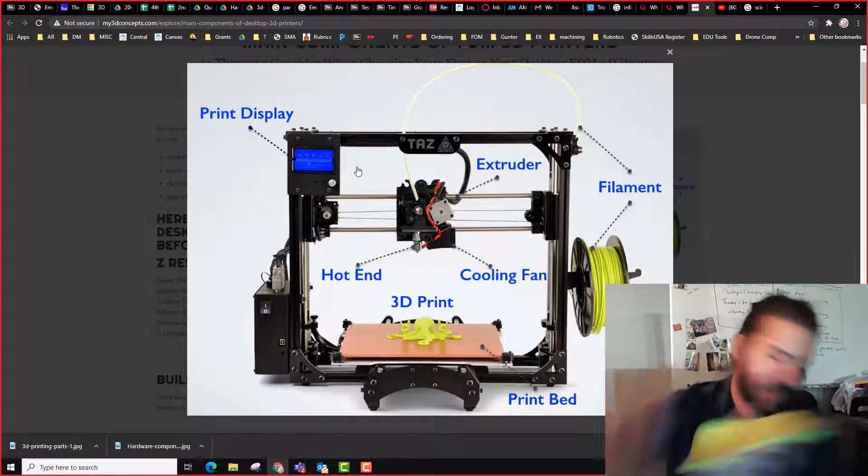This one uses plastic filament - it's kind of like a plastic string that goes up through here and comes through an extruder. This extruder is a little motor that can move this wire back and forth, and then it goes into this hot end. Imagine this is like the tip of a glue stick - it's really hot, you don't want to touch it, it'll burn you.

And it extrudes the melted plastic one layer at a time and slowly builds it up.

Now there's a few different axes here, and different 3D printers are labeled differently, but generally when I look at one of these, I just think of it like a graph. I make this my X and Y axis - the left and right is my X, the back and forth is my Y, and the up and down is what we call our Z, and those are all controlled with motors.

So here's the Z motors that twist and make this whole thing go up and down. This has motors here and here that make it go left and right on the X-axis, and this whole print bed goes back and forth on these rails, controlled by motors.

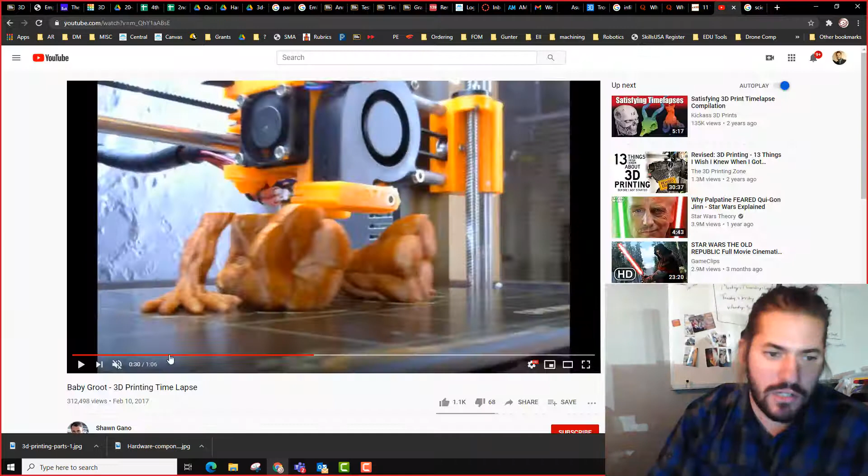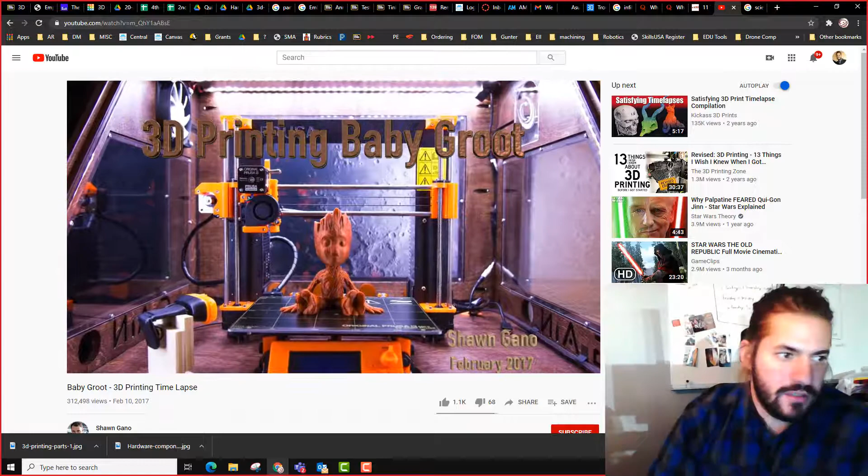So I'm going to watch - this is a video by Shawn Gano, a time-lapse of him making this little baby Groot. He actually does it in two parts - you're going to see him do the body first and then the head.

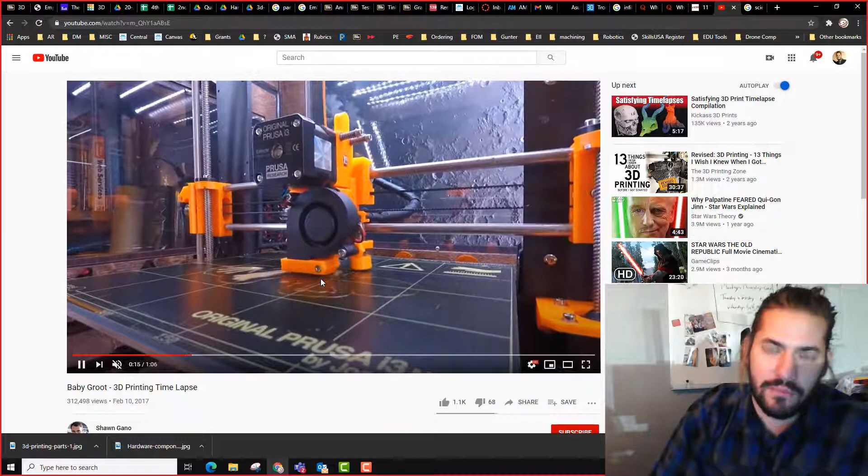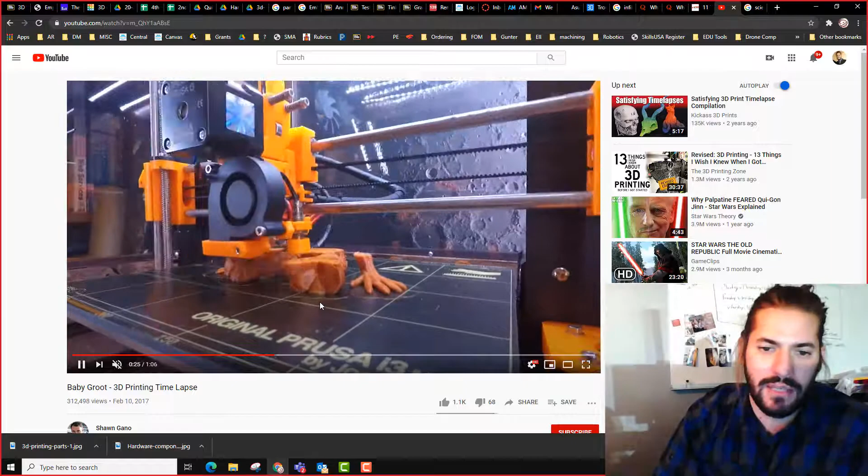Okay, so you can see it's doing the first layer, and if you look at this, it actually goes really slow. I think people think 3D printing is really cool, but it actually takes hours and hours. I have 4 3D printers in my class, and a laser cutter, and I kind of prefer the laser if I can make something with it because it's so much faster. But you can see it going layer by layer, moving up higher and higher.

This one, the bed moves as well. So he gets the neck, he stops, and now he's going to do the head. So there he makes the head, and he's going to chop that off somewhere and put it into the design.

And he's done. 3D printed objects tend to have these little layers - you can see these lines right here.

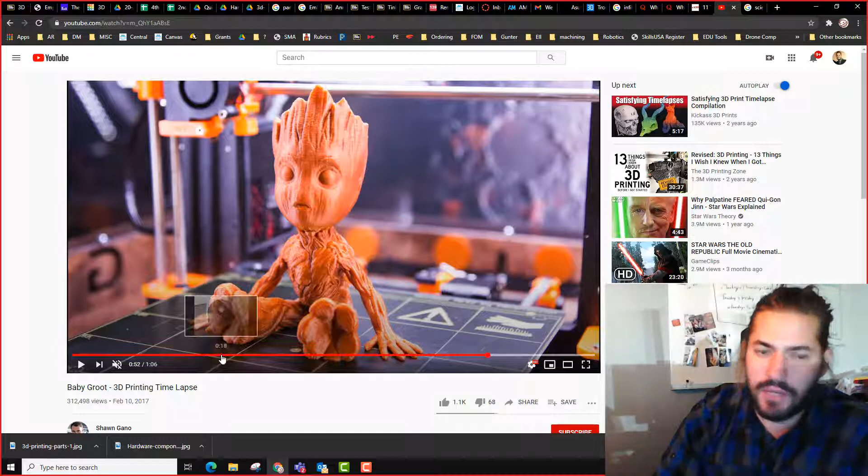Okay, so one thing to watch here is... where is it? Sorry.

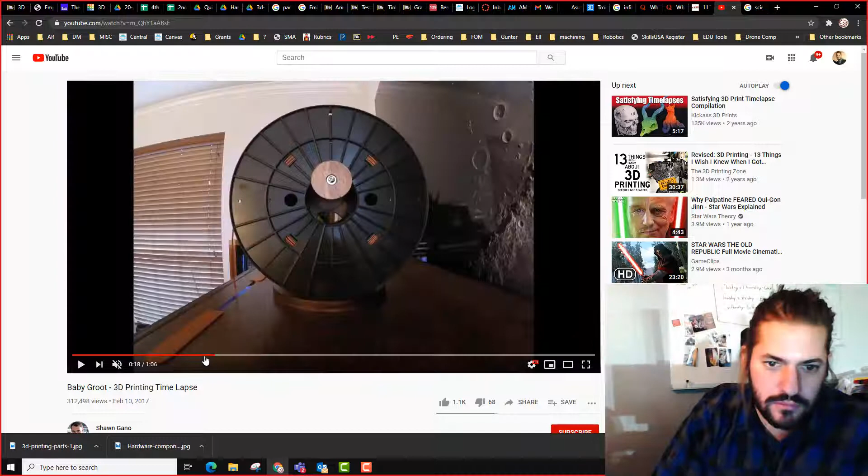Believe it or not, most of the time a 70% infill feels just as tough as 100%. It's really strong, so it really depends on what you're making, whether you want to use an infill or go 100%. You need to think about that.

These patterns are for different reasons. If you want different kinds of strength, like strength along the outside or a certain direction, the honeycomb's really good for that. It just depends - some of these are designed for saving filament. The reason you want a pattern, and generally don't just always go with 0%, is...

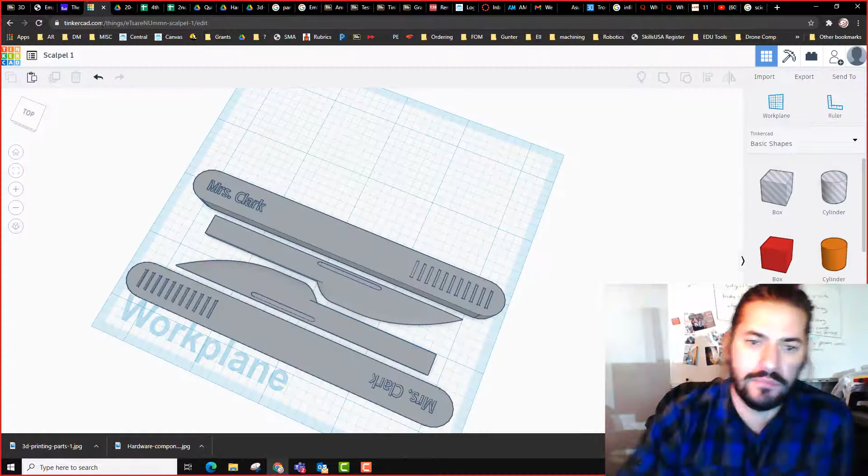So this is something that we 3D printed for a class. They're doing a competition where they demonstrated surgery and weren't allowed to bring a live blade to class, so one of my students made this for that teacher to use.

Okay, I'm going to go into Tinkercad and I'm going to create a new design.

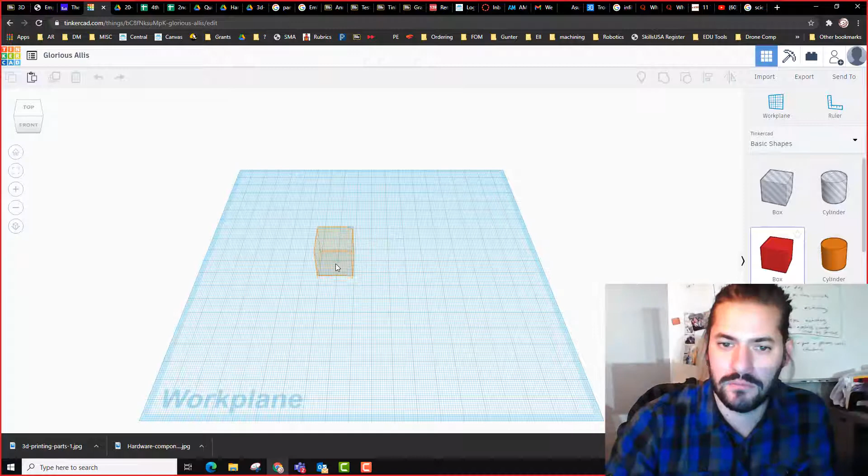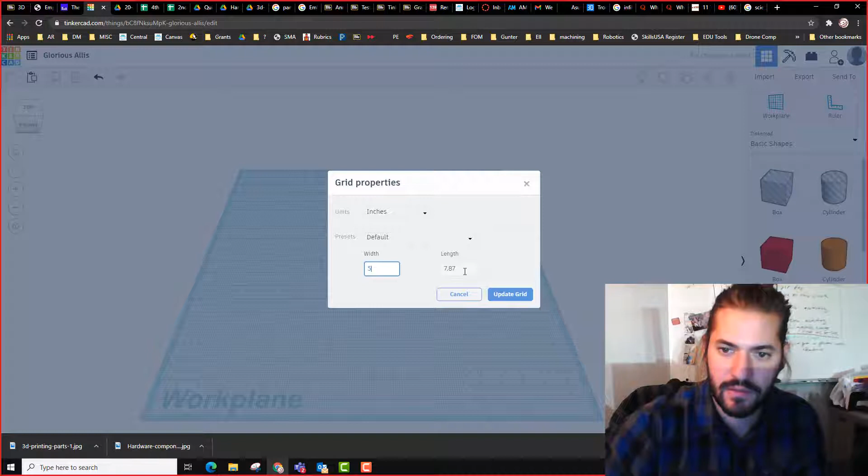First off, when you 3D print, the size of your print bed is very important, right? So I already told you guys that it was in inches, and the print bed is 5 inches by 5 inches. Okay? So you can see each one of these grids represents an inch.

So I'm going to take this and make this, okay, 4 inches. All right? Then I'm going to click this, and I'm going to hit the duplicate button up here.

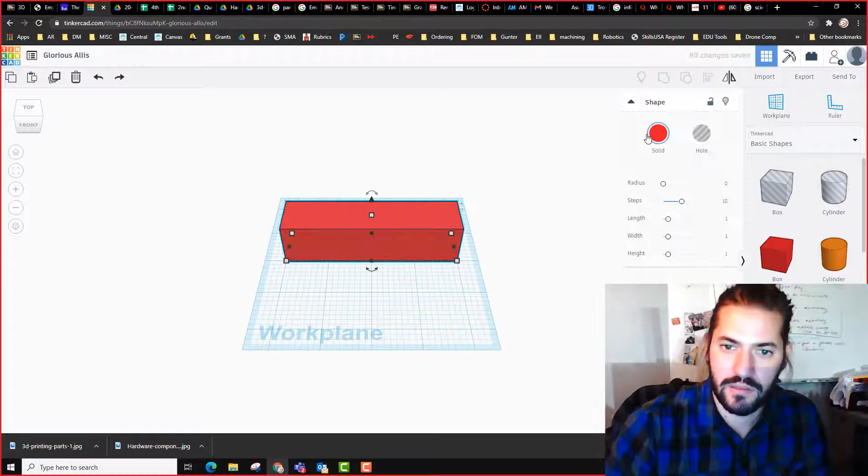Oh, actually, before I do that, I'm going to make this transparent. This will make it a little easier. So let's say this is the shape we're trying to make. I'm going to hit duplicate now. And I'm going to make this not transparent.

So remember, this is additive manufacturing. You're adding a layer. It prints the first layer, then the next layer, then the next. It's slowly building its way up. So while you're thinking about how it prints, let's talk about some shapes.

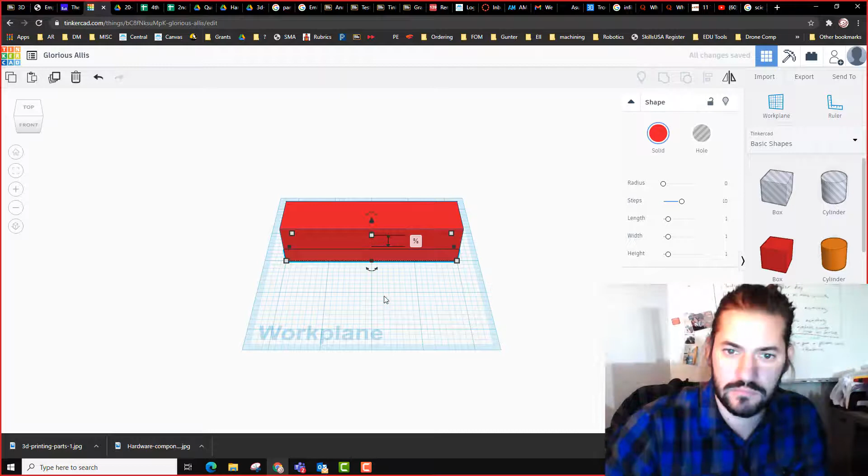So I'm gonna take this, put this down. Okay. Delete that. Okay. I'm going to bring this up 1 inch. Take some of these guys. Paste it.

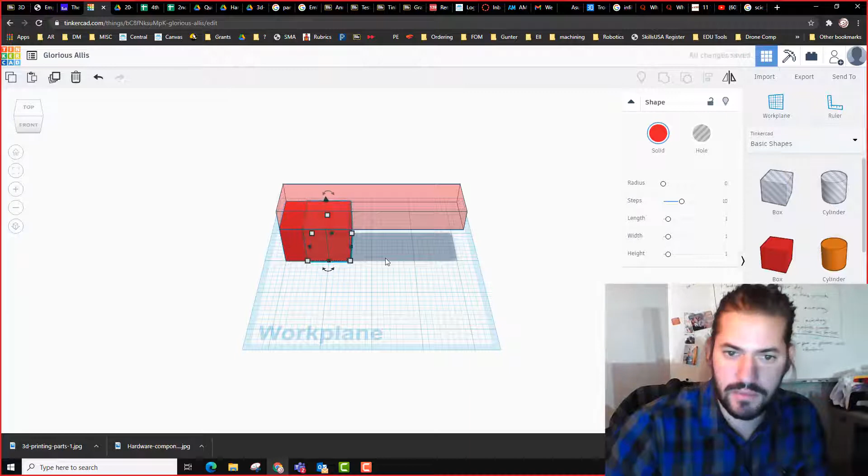And let's make this color all solid. We're going to make it one shape. Okay. So,

Kayla, what do you think? What would you think would happen if I sent this to the 3D printer? Do you think it would print just fine, or do you think there'd be any issues?

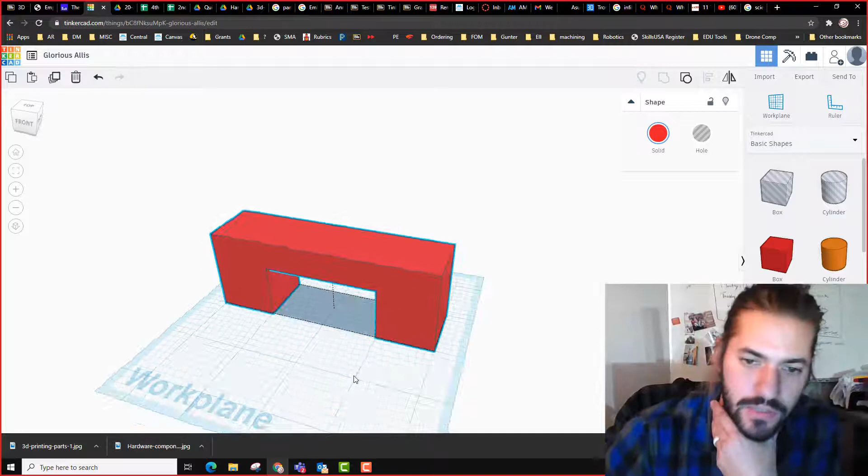I think it'd be an issue because it's too tall. The tall, kind of. Keep going. Let me see where you're going with that.

So actually going straight up and down is not an issue. So like if I want to print this right here, even though it's taller, this isn't going to have an issue.

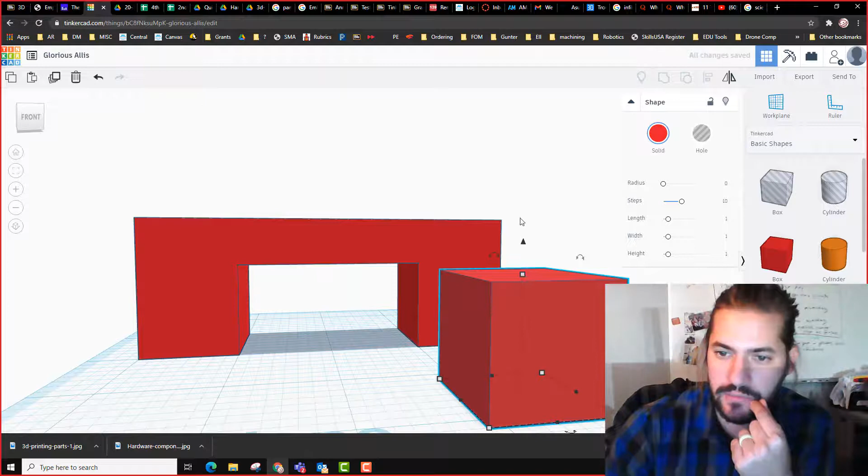So why do you think this one would have an issue when this one wouldn't? Is it because how thick it is? Nope. It has to do with that gum stretching theory I talked to you about.

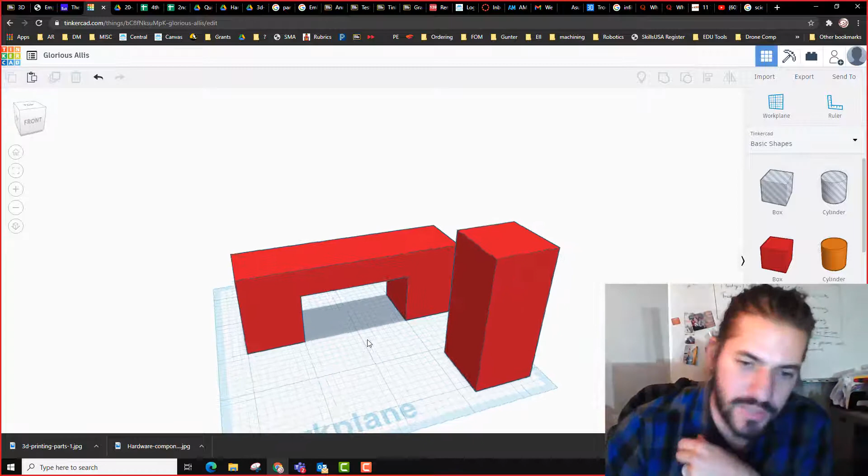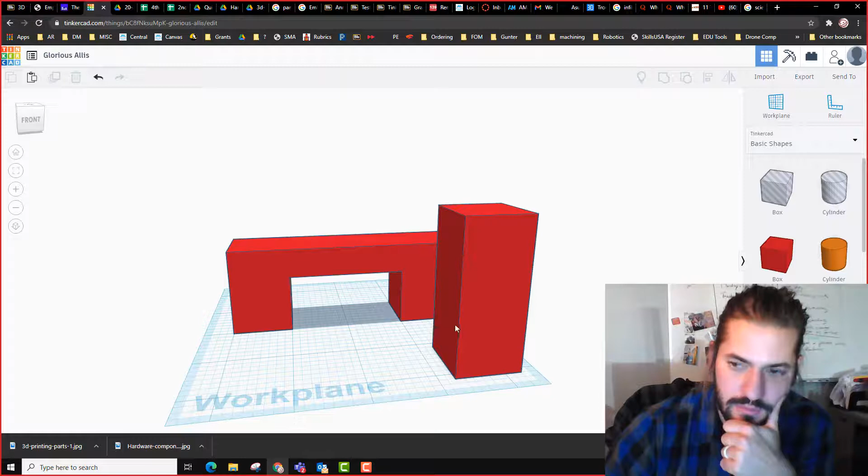Think about that. Is it too long? Kind of. So think about if I was to take a piece of hot glue and try to go across this thing, what would happen? It's not a solid, so it's going to droop down, right? It's going to create what we call a bad print.

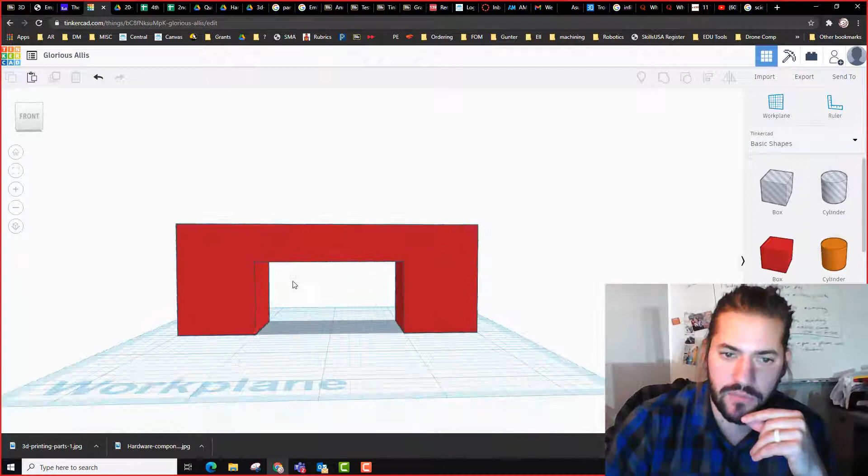Where's my design? Okay, yeah, right here. Okay, so if you try to print from here to here, it won't work. Remember the infill - if this was hollow and tried to go straight across to make this top, it's going to sag down. So you need an infill.

Well, one way to solve this is by adding supports, okay? And your slicer will generally automatically do this for you. So I'm going to make this.

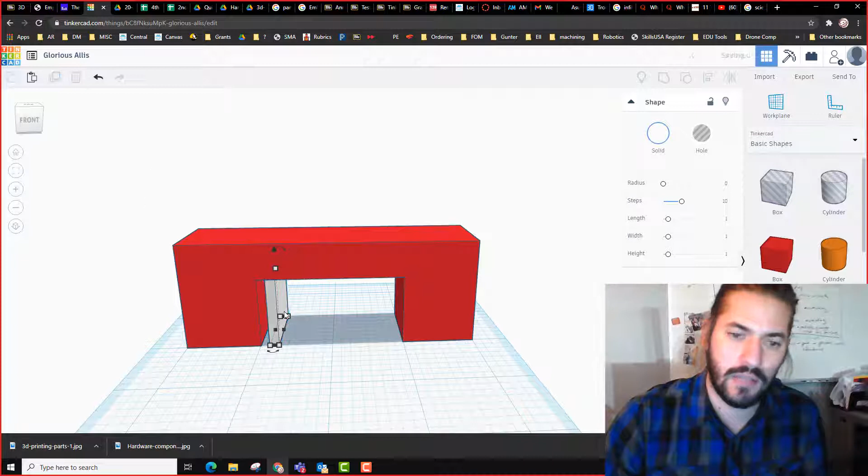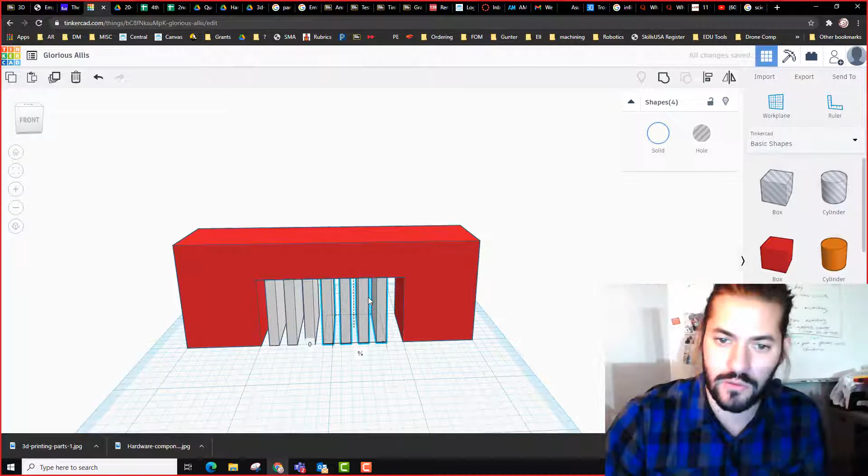Like with 3D printers that you're going to be using in this class, you're not going to have to worry about the supports, but I still want you to try to use the least amount of support possible, because it's expensive material. But do you see how if I was stringing that across, these supports would help keep that straight? Does that make sense? It wouldn't wobble down.

But there's a better way. Do you think there's a better way we can make this shape without having any droopiness but also not having to use supports?

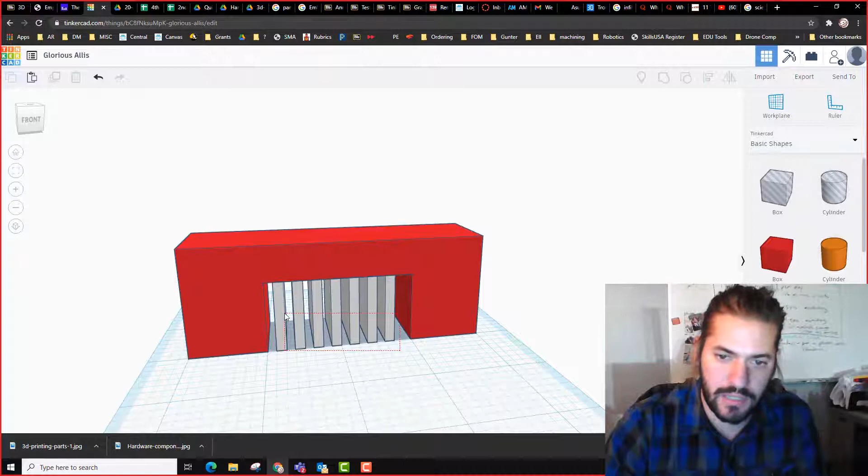If you turned it on this side, it would still be drooping. Let's do that. But if you turned it on its side - so where would it droop here?

It would droop like right here, because if you put the hot glue on there, it's gonna drip down still. But you're not - it's just building straight up.

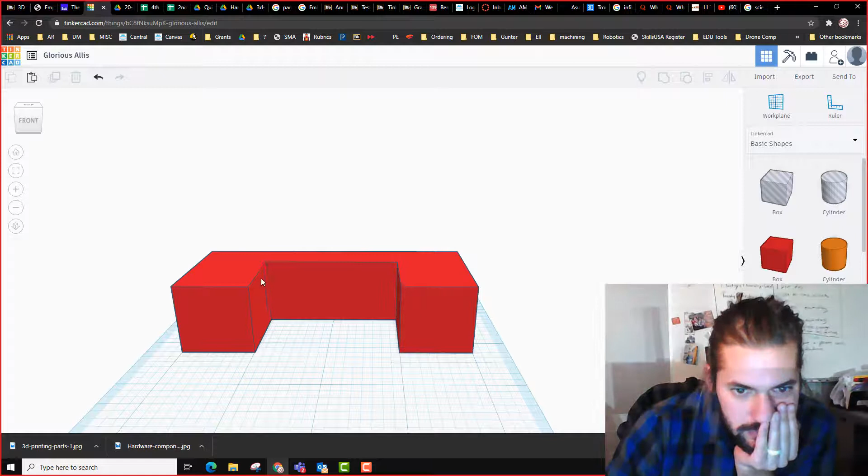Do you see? Like where you had it the other way, when it goes across here, it doesn't have anything to hold on to, so it's going to droop down. But this way, it's just building right on top of itself.

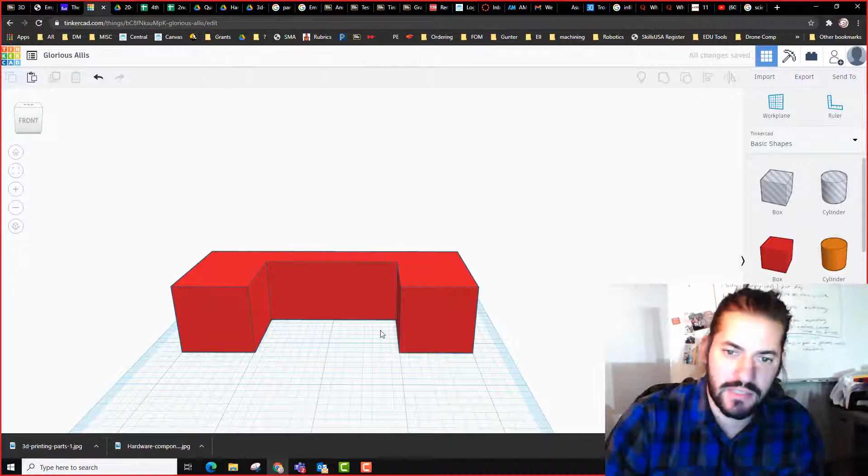And then another way to do it too - so let's go back - is I'm going to use the mirror function up here, like this.

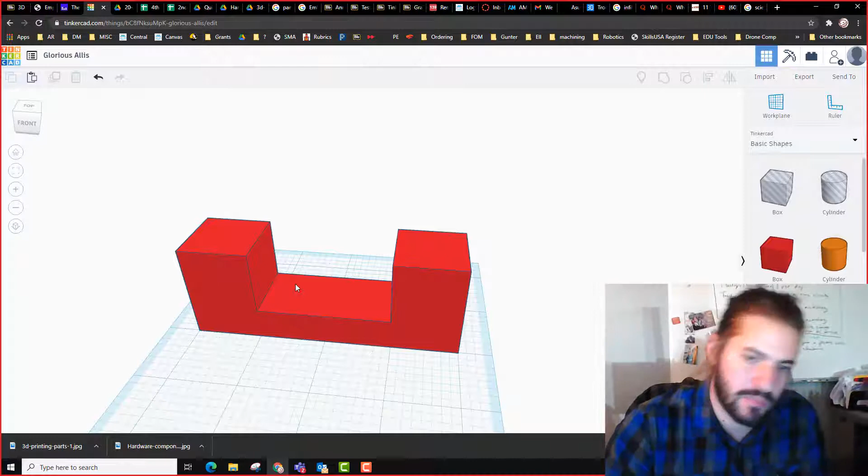So this is really the main thing I want you guys to take away from this video: understanding how to position your piece. It can save a lot of time and get you a better print by just knowing the right way to position the piece. This is the best way to do it for this particular shape, and you'd get a nice flat top, whereas the other way you'd get a nice flat side. It just really depends what the piece is for.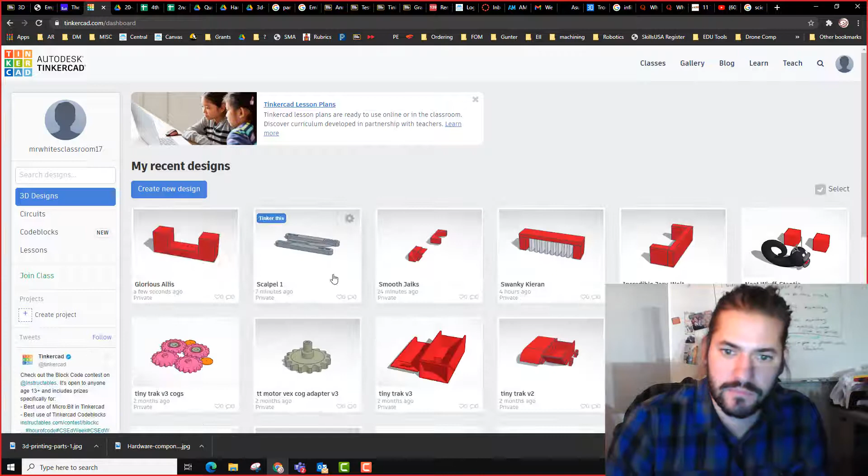Okay, so let's go. I have another design here and another question. All right, this one right here. So this shape right here.

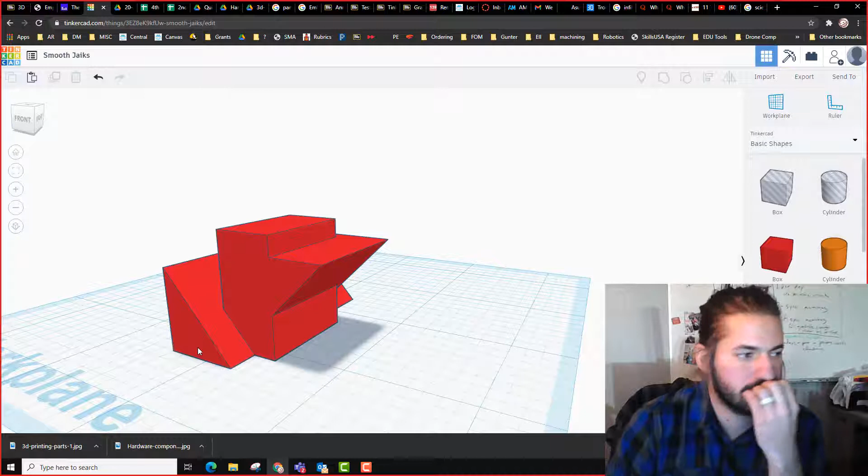Do you think I could 3D print this shape right here and not have any drooping? What do you think? I feel like this is tricky. Maybe, just go with your gut. You've never done this before, so there's really no reason to feel bad about being wrong. This is more just knowledge than anything, but I like letting you think about it.

I feel like if you're going straight up, kind of, and then kind of not. But then if you're going side to side or however you say it, I like the way you're thinking, and the answer is yes, you could 3D print this.

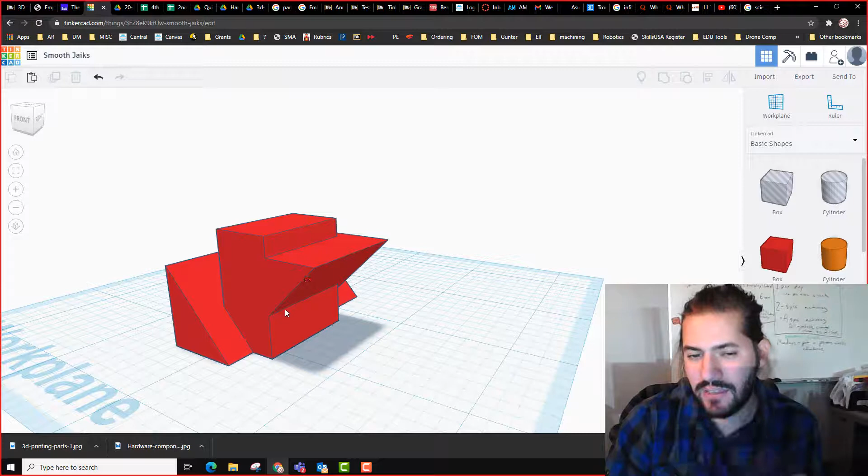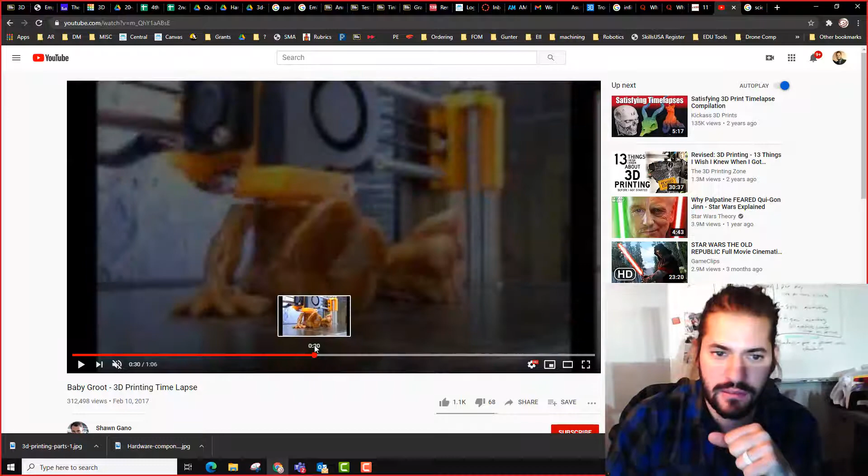I want to show you, let's go back to this video, right there. Okay, so right here, look at this overhang. You see how it's printing just fine right there? It can go a little bit to the side, it just can't go way out.

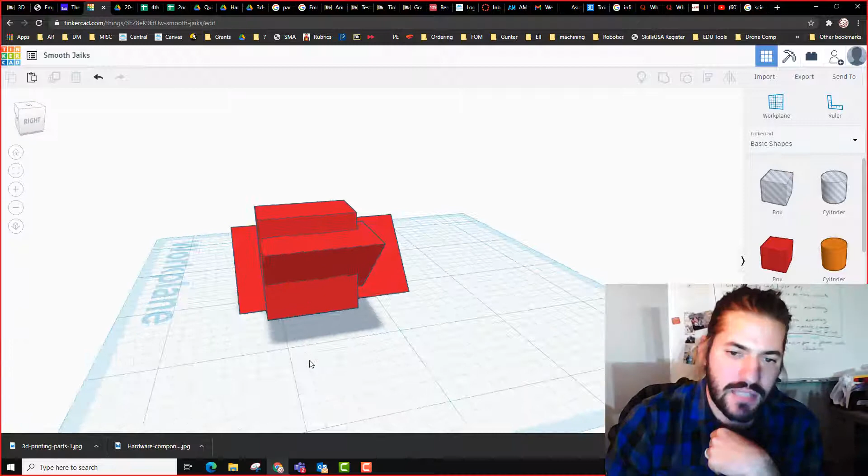Does that make sense? Just a little something I want you guys to know, because if you've never done this before, you don't know that. A lot of mistakes with 3D printing are just because people position their pieces down wrong. Some slicing programs automatically put it the best way, but the one we use in this class doesn't. So it could print this just fine.

All right, and this is probably the best way to print this piece. The program might add in supports later, I mean you never know. Okay, so something like this.

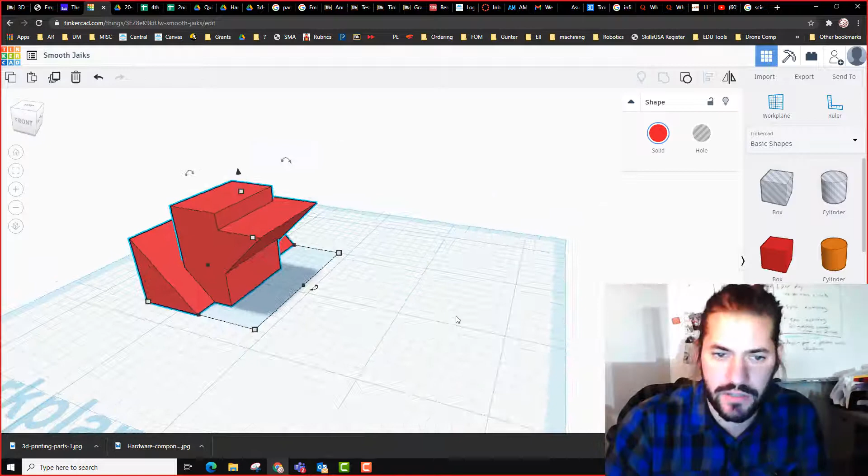If I was to make this shape right here, I've been doing this in my other classes, and when I don't align it in the middle, for some reason it just really bothers me. So I'm going to align it, even though it's just an example. Let's say I make that. Go.

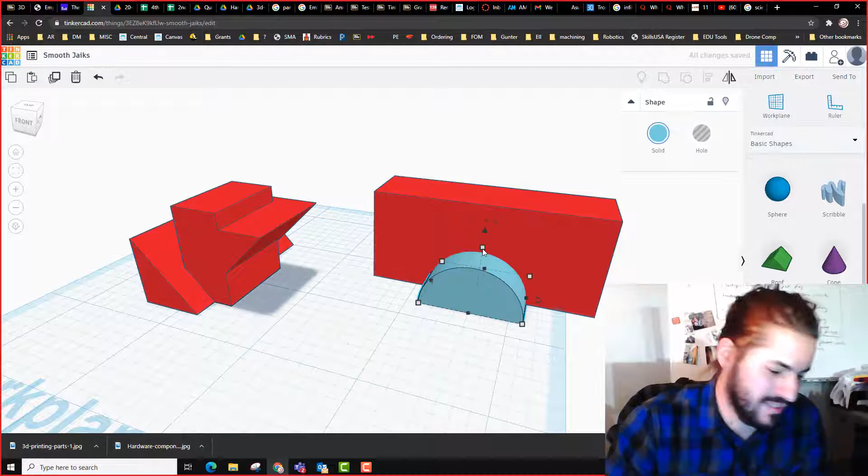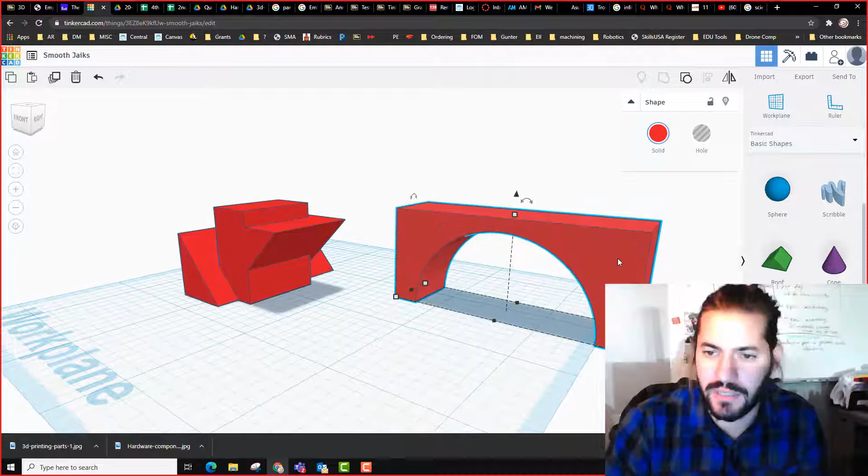So yeah, it could 3D print this piece this way. Now it might make a little support piece in the middle, I don't know, it just kind of depends if the program thinks the material can do that or not, but it could print it like this. But do we want to? No, it's obviously going to be better to either print it upside down like this or at a 90-degree angle, right?

Okay, does that make sense? So just think about that. So let me make sure we covered everything. We talked about what additive manufacturing is. Additive manufacturing is whenever you do layer by layer like this, and it can be metal, concrete.

Like they have 3D printers that are giant and use concrete and can make buildings. It's pretty cool. They have metal ones that have microwaves in them that superheat the metal. I read that on Navy aircraft carriers and big ships, instead of carrying a bunch of backup parts like they used to, they have these $1 million metal 3D printers that can use additive manufacturing to make whatever part they need, so they don't have to carry as many parts on hand. All they gotta do is bring the material to make it.

So pretty cool. We talked about infill, talked about the parts of a 3D printer, and kind of how to position your piece. Those are really the most important things I want you guys to take away from this. Some future things we're going to cover are how to connect the pieces, how to get better with using measurement, and how to import other designs and where to find other 3D print designs and modify them. That will be in the next part. So thank you, and I hope good luck with the quiz.